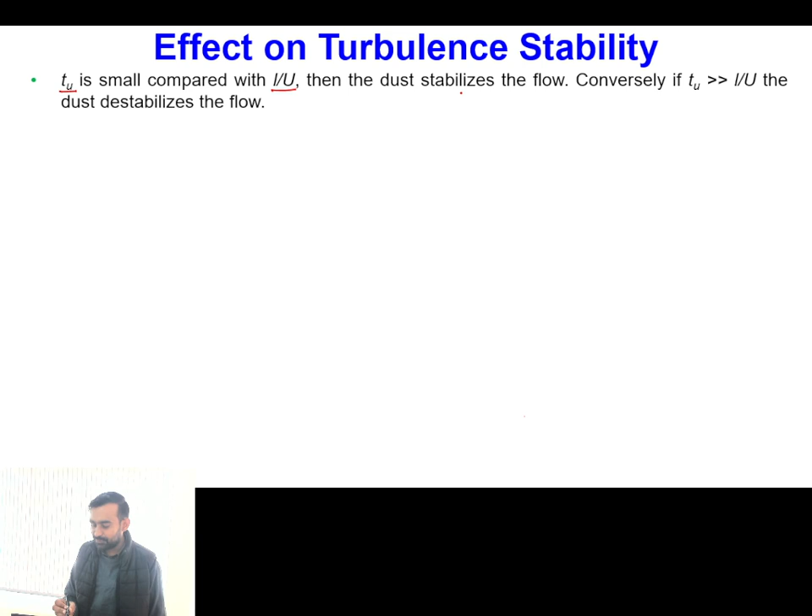So if you recall, we discussed that tau_u is our momentum relaxation time, and l/U is the time scale of the flow. If tau_u is small compared with the time scale of the flow, then particles will actually stabilize the flow, because particles will try to follow the motion, and while following the motion these will consume the turbulent kinetic energy, ultimately resulting in decrease of the turbulent intensity.

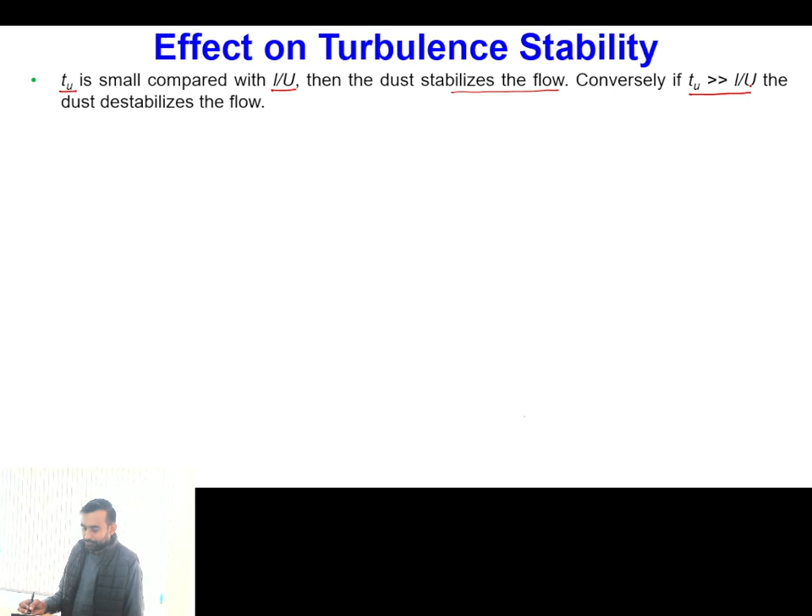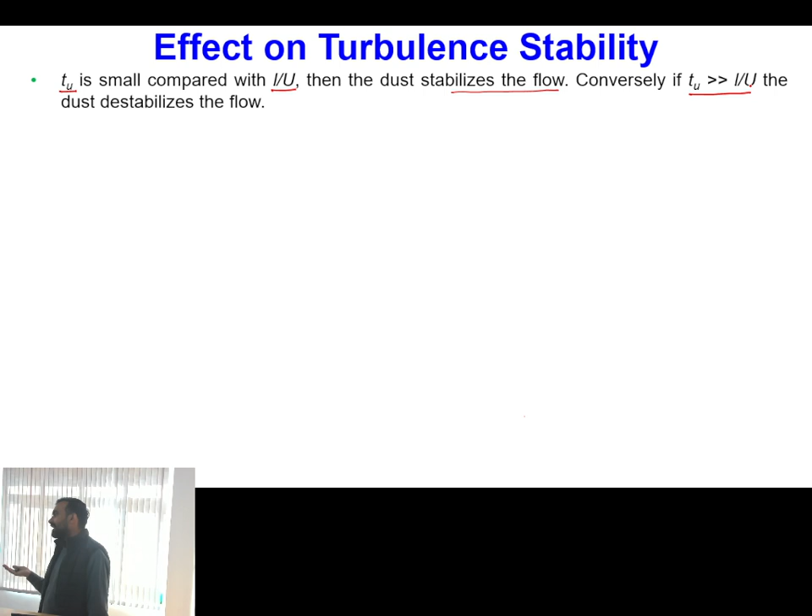On the other hand, if tau_u is large enough in comparison to the flow time scale, the particles will not be able to follow the flow, and particles will respond slower compared to the fluctuations in the flow. In that scenario, what happens? The flow will take place over the particles, and that will lead to generation of more turbulence.

Likewise, in the previous discussion we assumed that all the particles are of solid nature, but when we have multi-phase flow, in place of solid we can have fluid particles as well. So typically, if we have a gaseous bubble present in the liquid, we know that the gaseous phase has compressible nature.

Because of its compressibility effect, if pressure in these directions is increasing, it can deform into this type of shape, and when there is reversal of the pressure, it can occupy this other type of shape. So we see that when gaseous or liquid particles are present within the flow medium, these particles can have oscillations in their shape, changing from this shape to this and then again to this.

So if we estimate the oscillation frequency of the shape change of these fluid particles, and compare it with the natural frequency of the fluid particle, if this ratio of omega_m divided by omega_n is very small compared to 1, then the primary effect of the bubble is to increase the effective compressibility. On the other hand, if the reverse situation is there, the frequency of shape oscillation of the bubble is either comparable to natural frequency or more than the natural frequency.

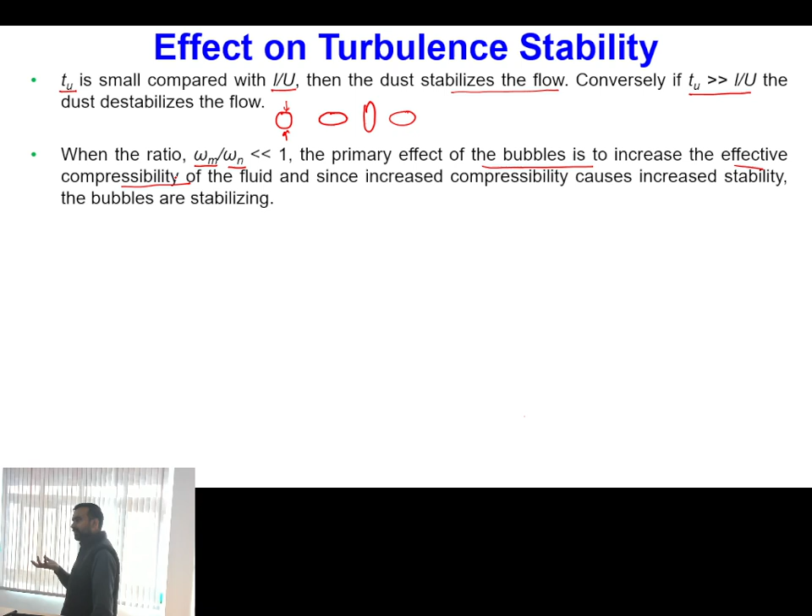In that case, what happens? The bubble oscillations will take place at a faster pace compared to its natural tendency, and it will try to destabilize the flow. Is this point clear?

Now, so that is what I have already told you. We can have some bands of frequency in which flow is less stable, and bubbles are therefore destabilizing.

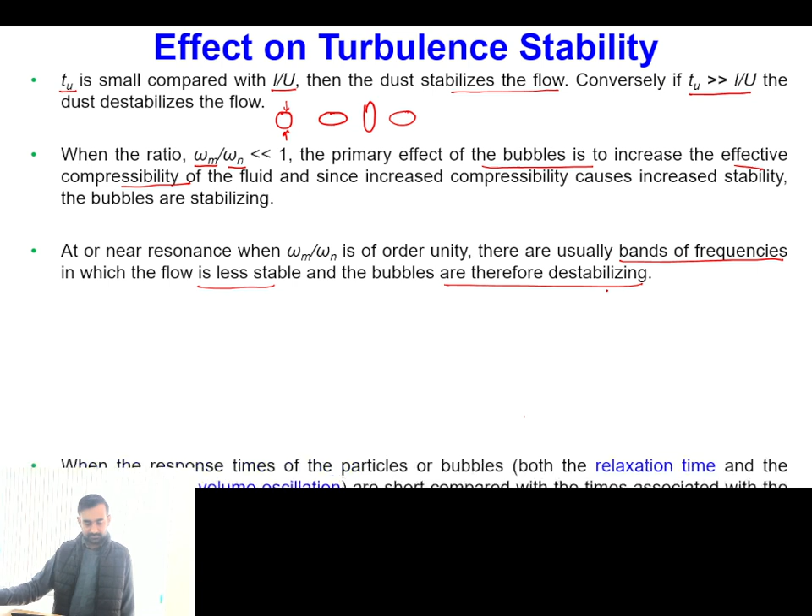In general, we've seen that it's not only the particle relaxation time. In case of fluid particles, along with particle relaxation time, there will be oscillations in the shape of the particles also. So in general, we can say that when the response time of particles or bubbles, both relaxation time and natural period of volume oscillations, are short compared with the times associated with the fluid motion, then the particles will be quickly responding to the flow.

And what can be done? We can say that particles, or the complete flow, can be characterized with effective properties such as effective density, viscosity, and compressibility, etc. Instead of using the characteristics of one particular fluid, we can define the mixture density, mixture viscosity, etc. to characterize the flow. Is this one clear?

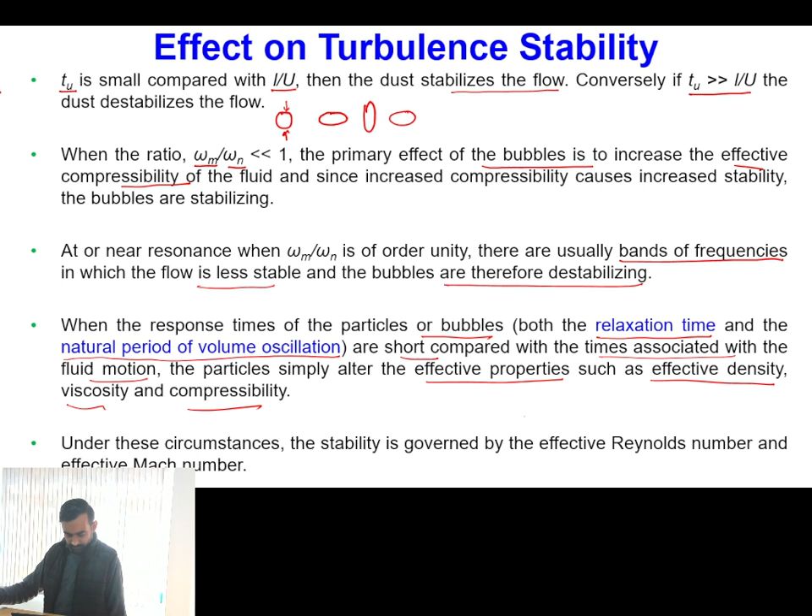So let's see, for example, if I assume I have solid particles present in the fluid, with volume fraction alpha, then the effective density of the mixture of these solid particles and gas becomes equal to 1 plus alpha times rho_s by rho_g. This is the effective increase in density, a multiplying factor with rho_g for effective density. Is this one clear?

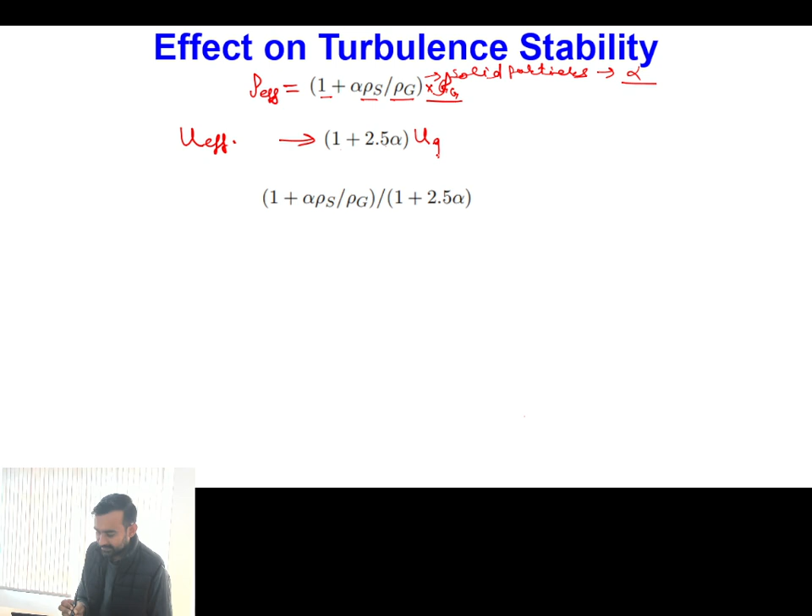Likewise, in terms of viscosity, the effective viscosity becomes 1 plus 2.5 times alpha, times viscosity of the gas. So this factor 1 plus 2.5 alpha is the enhancement factor for viscosity. Is this point clear? It depends upon the volume fraction of solid particles present.

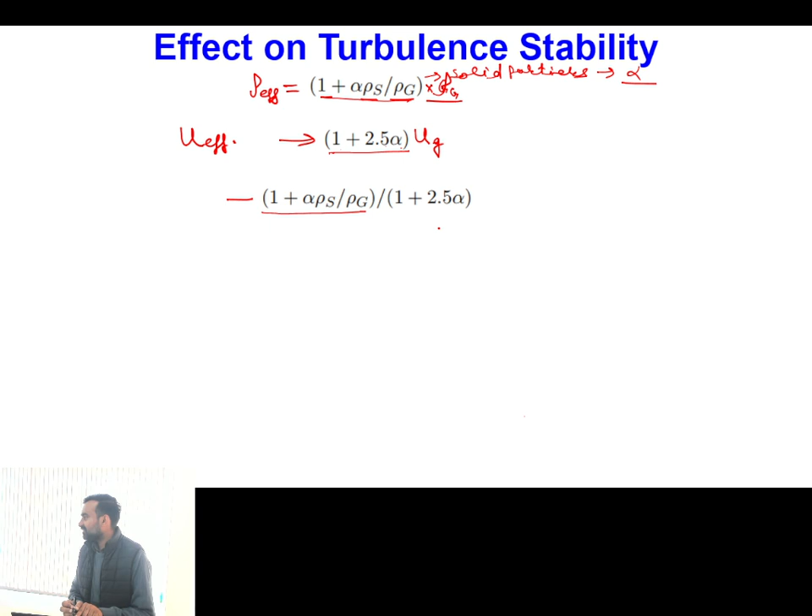Now, if density is increasing by this factor and viscosity is increasing by this factor, we know that Reynolds number will be affected, because in the Reynolds number definition, density comes in the numerator and viscosity comes in the denominator. So this particular factor characterizes the effective Reynolds number, equal to, say this factor is my k, times Reynolds number for the gas. Is this one clear? Now whatever flow parameters I need to specify, I can define based on this effective Reynolds number.

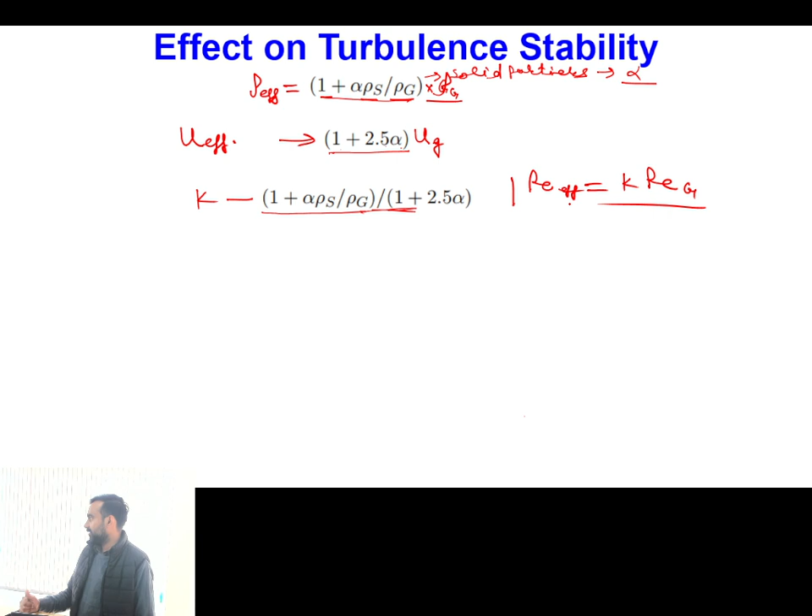If the response times are comparable or greater than the typical times associated with fluid motion, then particles will not follow the motion of the continuous phase. So if the particle is not following the motion of the continuous phase, there will be relative motion between the dispersed phase and the continuous phase.

Once there is relative motion, we cannot make the assumption of effective properties. We can take effective properties, but at least the flow parameters cannot be effective.

Like in the previous case, while defining the Reynolds number, I simply used the multiplication factor for mixture properties, and velocity in both the Reynolds numbers I considered the same, because the particle size was so small that whatever is the velocity of the continuous phase, the same will be the velocity of the dispersed phase.

But in scenarios where the relaxation times are comparable or greater, there particles will not be able to immediately acquire the velocity of the continuous phase. So it will not be able to sense the fluctuation in continuous flow parameters. So we will always find some relative velocity between the particle and the continuous phase.

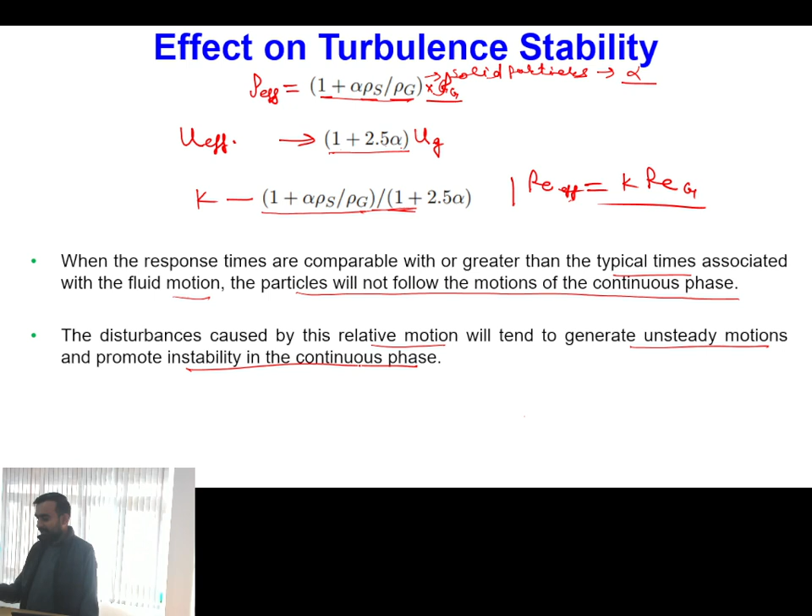Now this is something about averaging. I will not go into mathematical detail, but let me quickly explain to you about the averaging process. If you recall, while we were discussing the control volume for defining multiphase flows, we used one parameter epsilon, which represented the volume of the control volume, selected so that a finite number of particles of the dispersed phase can be accommodated inside a single control volume.

And there we made one statement, which at that time I skipped: that the derivative of the average properties is not equal to the average of the derivatives of the properties. So that is what is given over here.

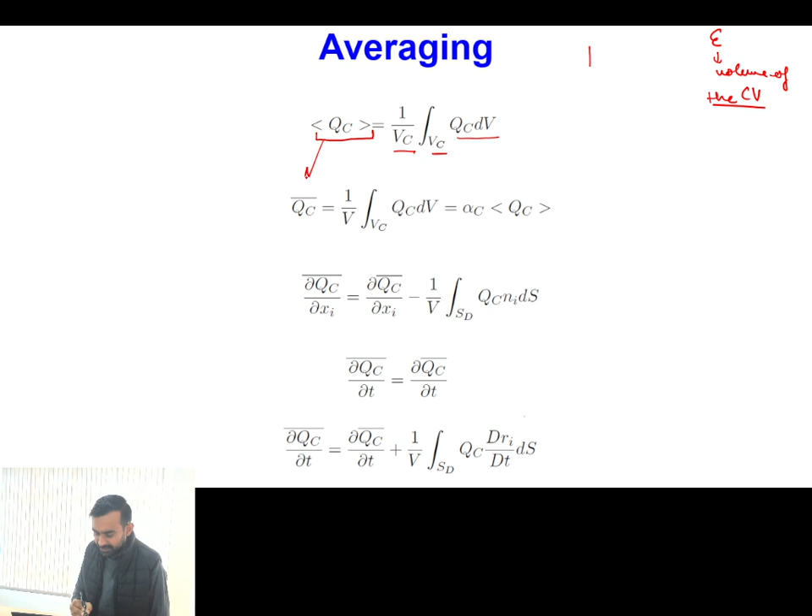So one way of defining some volumetric average of a property of the continuous phase: QC for the continuous phase is defined as 1 by the volume of the continuous phase, integrated over the volume of the continuous phase, of QC. If I have to define the average of the same property, but not with reference to the volume of the continuous phase, but with reference to the total volume of the control volume, then instead we use 1 by V and integral of QC, because the variation I am only accounting for is the continuous phase property. So integration should only be over the VC part.

Is this clear? Now, if I multiply by VC and divide by VC, then VC by V becomes alpha C, and 1 by VC comes in the denominator, which makes this average equal to that. So it means that if you take the average only over the continuous phase volume, and take the same property for the continuous phase but with reference to the total control volume, then the average with reference to the total control volume will be equal to the volume fraction of that phase times the average of the property using the volume of that particular phase.

Is this point clear? Now, up to this point it is simple, but after this you can see one important term: del QC by del Xi. QC is any property of the continuous phase. If I write del QC by del Xi, what does it mean? It means the gradient of QC with reference to position vectors, so it is the gradient of the QC property.

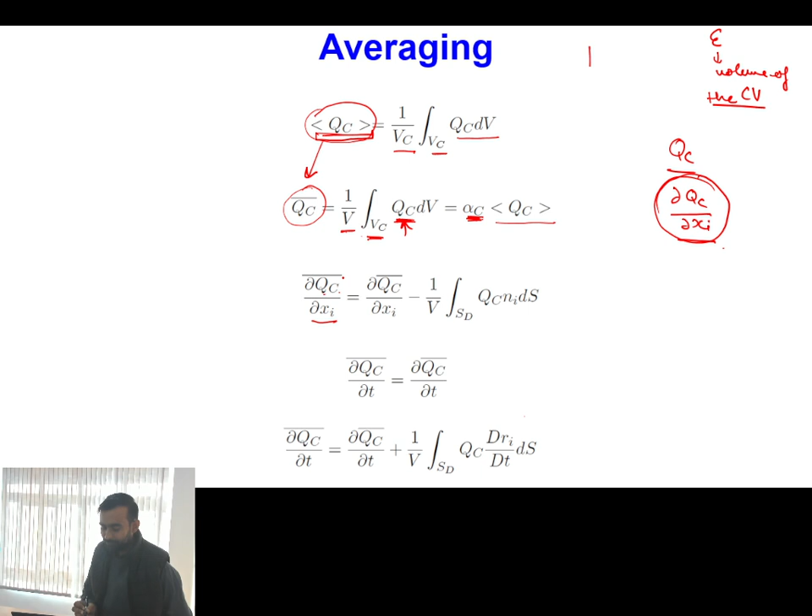If I define the gradient of QC and take the average of this gradient, that can be written in terms of the gradient of the average of that particular property minus 1 by V into the integral over SD, where SD is the surface area of the dispersed phase, of QC Ni ds.

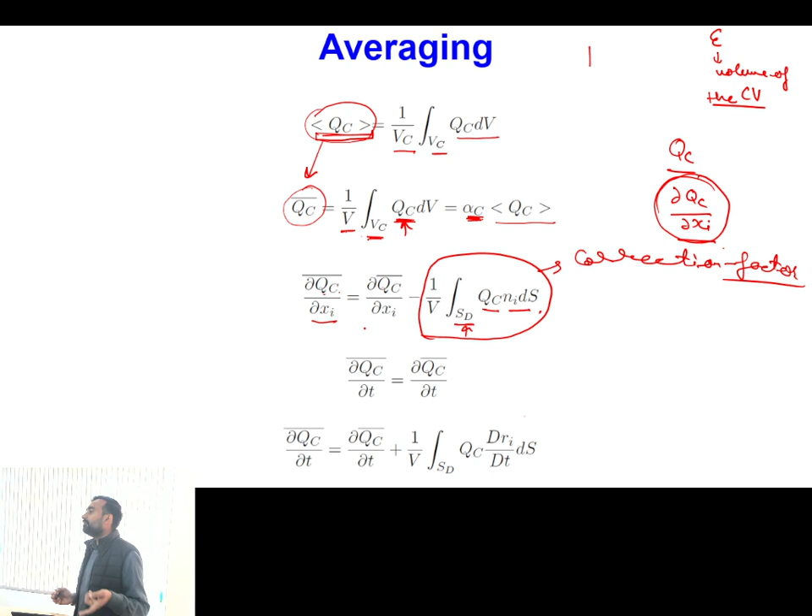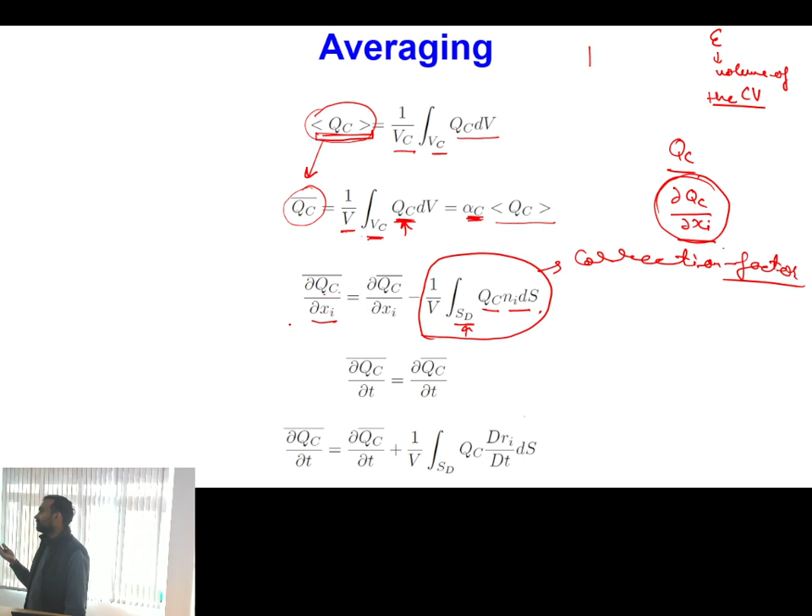So this is coming over here as a correction factor. How this correction factor arises, I am not going into the mathematical definition, but one important point to see is what we have in the left hand side versus the right hand side. In left hand side we have gradient of the property and its average, and in right hand side, first term we have average of the property and gradient of the averaged property. Mathematically, how this additional term comes, I am not going to define, but what we can see is that for a multi-phase flow situation, when we calculate the gradients, the average of gradient of the property is not equal to the gradient of the average property. This additional correction term is coming in.

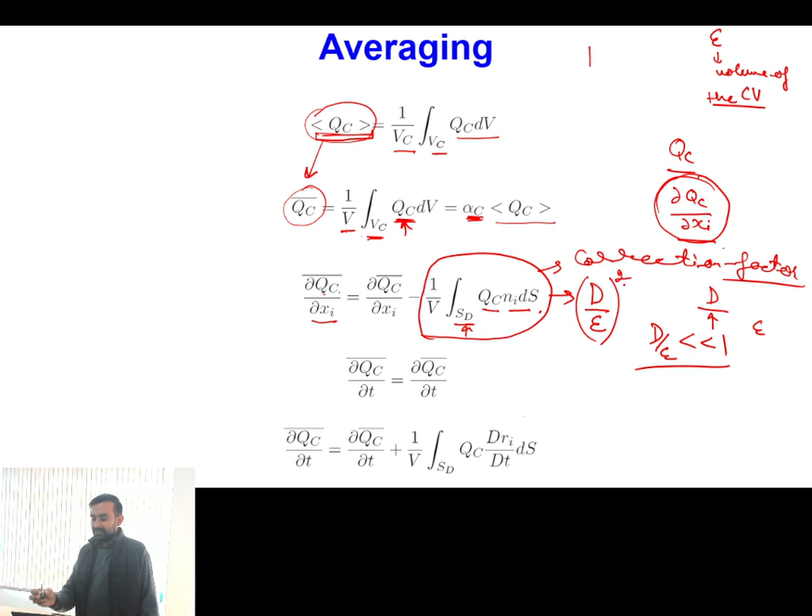The order of this additional correction term comes out to be d by epsilon square, where d is the size of the dispersed phase particle and epsilon is the volume of the control volume. If the ratio of d by epsilon is very small, the control volume will contain a finite number of dispersed phase particles within it, and the magnitude of d by epsilon square will be small. So if your control volume is sufficiently large to accommodate a finite number of dispersed phase particles, the magnitude of this additional term will be very small, and the gradient of property, its average, can be made equal to the gradient of the average property. However, if d by epsilon ratio is large, these two will not be the same.

Likewise, if the condition is satisfied that d by epsilon is much smaller than 1, then the time derivative of these properties will also become the same. If this condition is not satisfied, like d by epsilon is either nearly equal to 1 or greater than 1, then this additional correction term has to be taken into account. So let us discuss only this much for now.

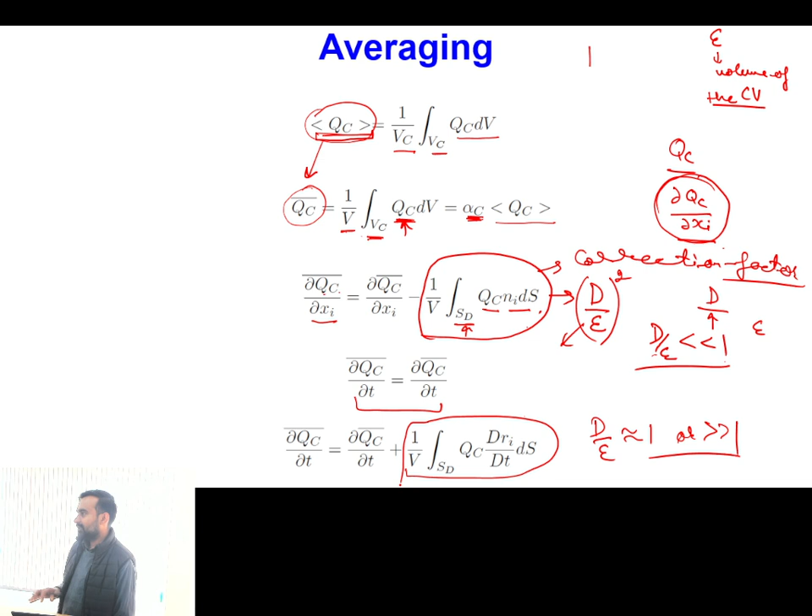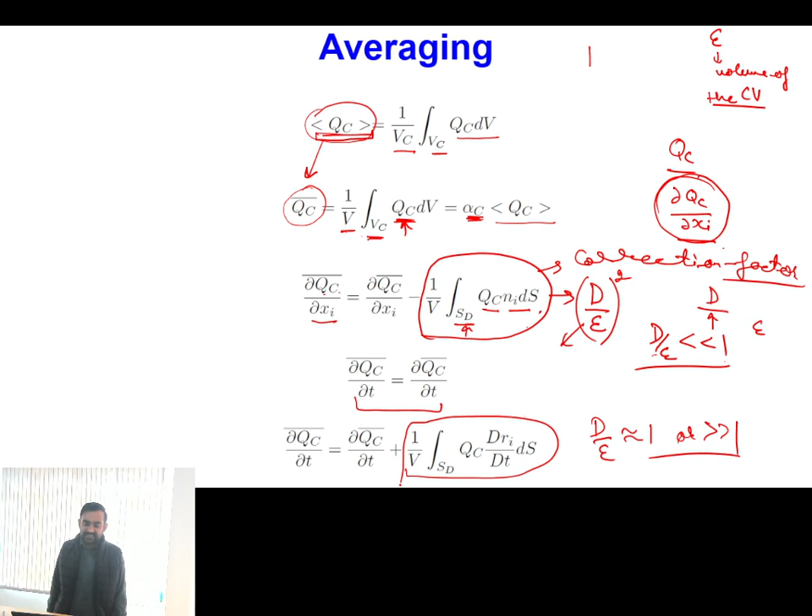Averaging can be defined in different ways. Either I first define the average of the property for the control volume, and then estimate the gradient of that average property, or the time derivative for that average property; or the other way is that I first calculate the gradient or time derivative of the property, and once I have defined that, then I take its average. These are two different processes, and in these two processes, if d by epsilon is small, both will give the same outcome. If d by epsilon is large, these two terms will give different outcomes.

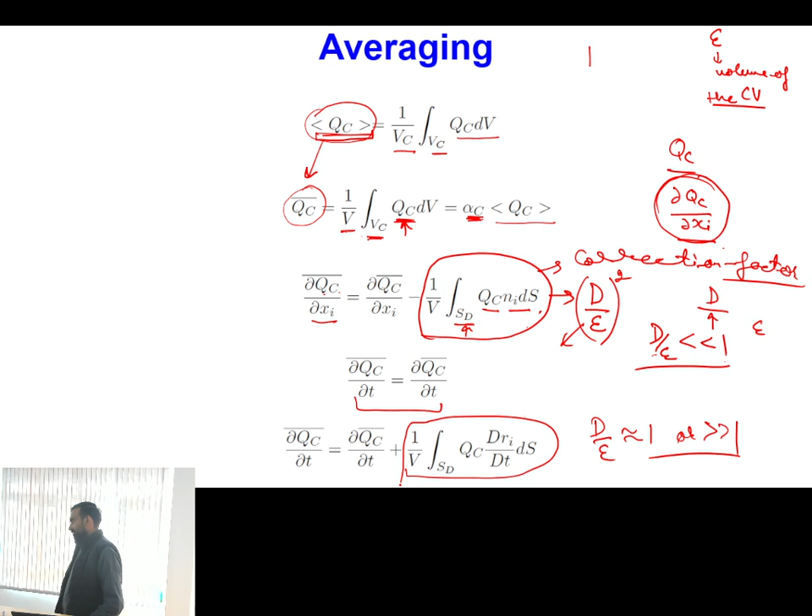Now let us discuss more about flow regime maps. Till this point we have got the idea about the governing equations applicable for multi-phase flow, and we have seen that these governing equations have different forms. Now depending upon the physical nature of the flow, we have to decide which type of governing equation to choose. Before choosing the governing equation, we should also know how my phases are distributed within the system. Unless the distribution of the phases is clear, we cannot select the appropriate governing equations for analyzing our flow situation.

For example, if I say that my particles are of very fine size and these are dispersed within the continuous phase, then I can simply make the assumption of homogeneous flow. I can assume that the velocity between the dispersed phase and continuous phase is the same, there is no relative velocity, and by just measuring the effective properties, I can simply use the mixture continuity, mixture momentum and mixture energy equations. On the contrary, if it is clear that particles are of larger size and there is significant drift between the two phases, then we have to account for individual phase equations, and in the individual phase equations we have to define the interaction terms across the phases.

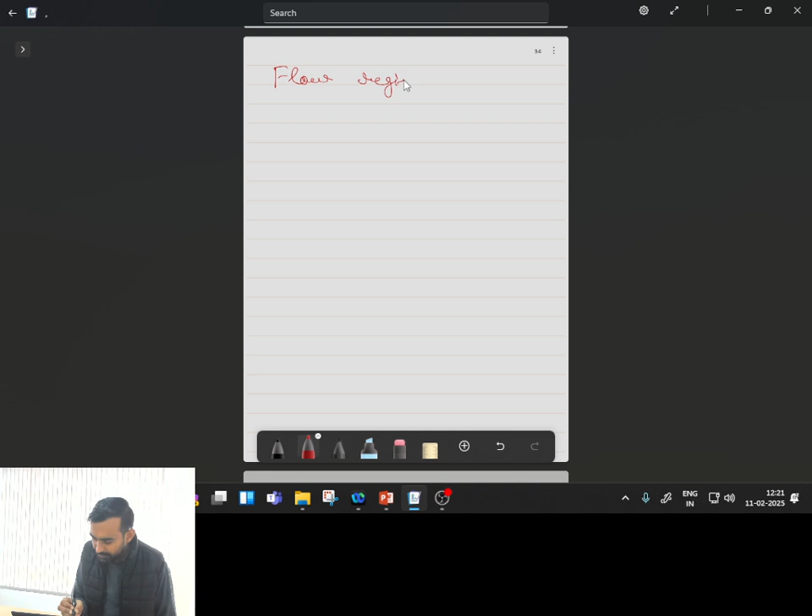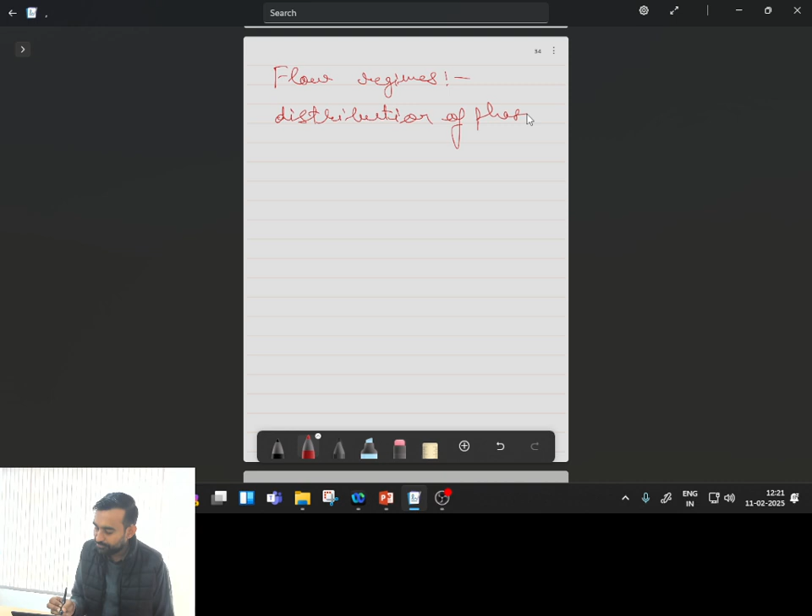Now, distribution of phases is actually very complex. Flow regime gives the idea about the spatial distribution of phases present in the system. Now can you tell me on what parameters this spatial distribution can depend?

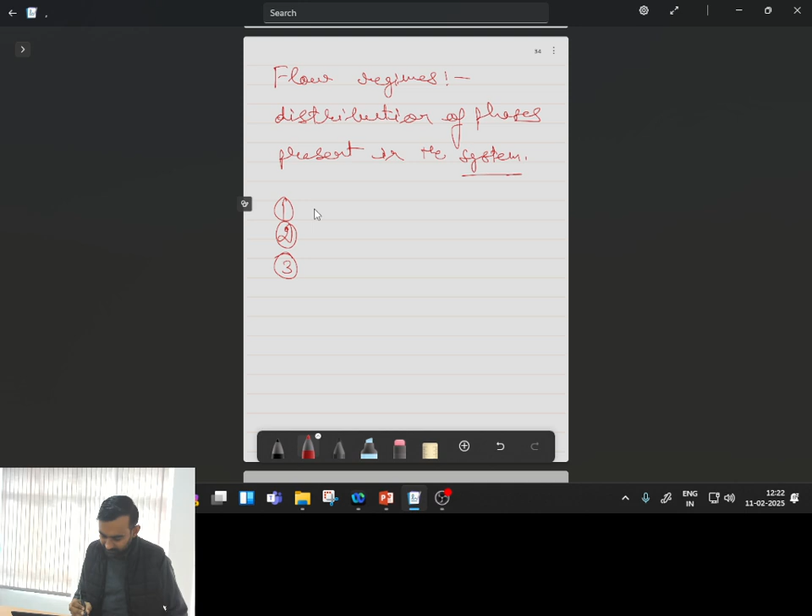If you have a circular pipe, there can be different arrangements of the flow. If you have a rectangular pipe, there can be different distribution because corner effects come into picture. If you have some pipe bend, something else will happen. If you have horizontal pipe, vertical pipe, inclined pipe, it means channel size, cross section, and channel orientation are some parameters which will be affected.

So these are some parameters which will be affected. Then what else? It will also depend upon the requirements whether my flow is adiabatic or it's a phase change process.

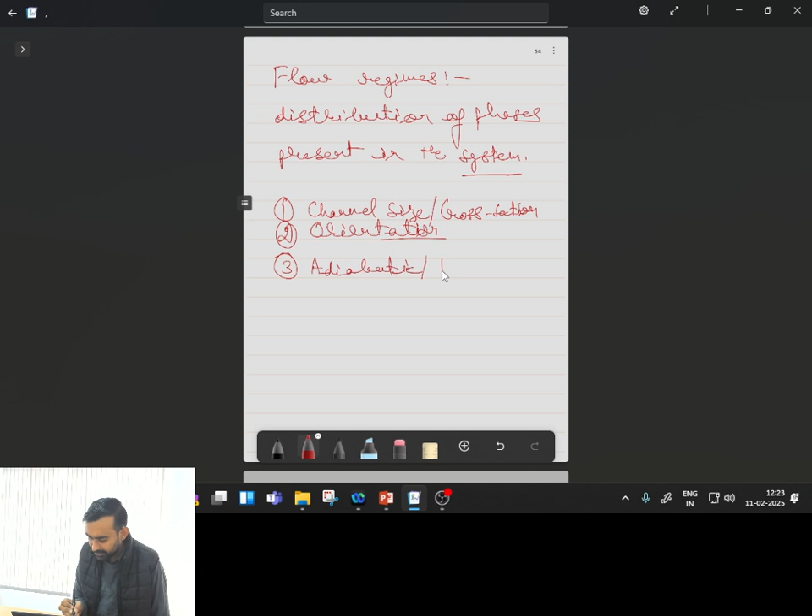Because if I am having an adiabatic situation, then depending upon the rate at which we are supplying flow from the inlet, mostly it should have almost the same amount of volume fraction present at different portions of the pipe. But if I am having a phase change process involved, for example in case of flow boiling, then near the inlet of the pipe I will be having less vapor fraction, but as I move away from the leading edge and come closer to the end of the pipe, more vapor volume will be generated. So vapor fraction will be increasing and liquid fraction will be changing along the length of the pipe. So it means whether my flow is adiabatic or diabatic, whether heat transfer is involved or not, depending upon that the distribution can change.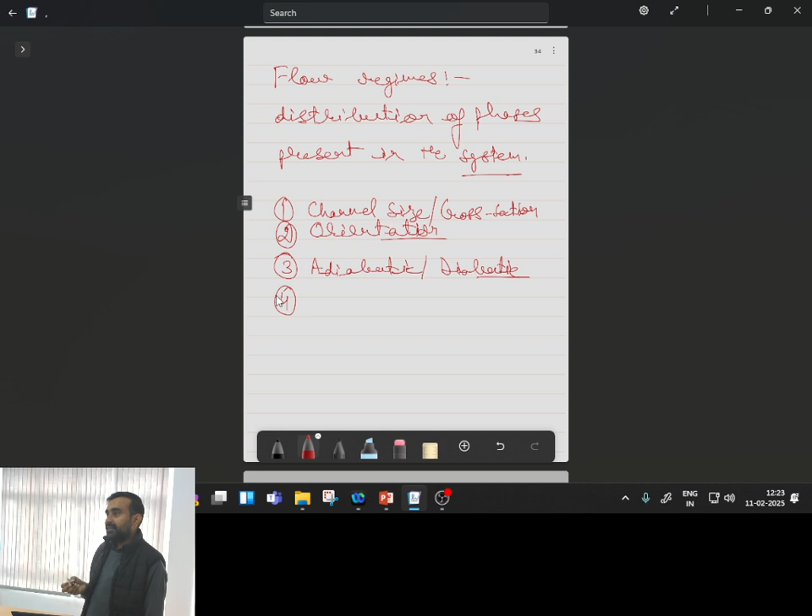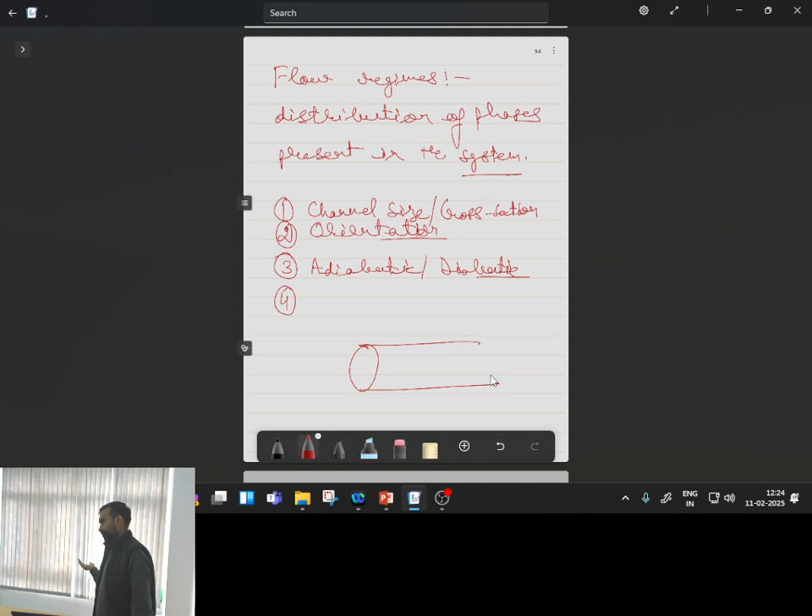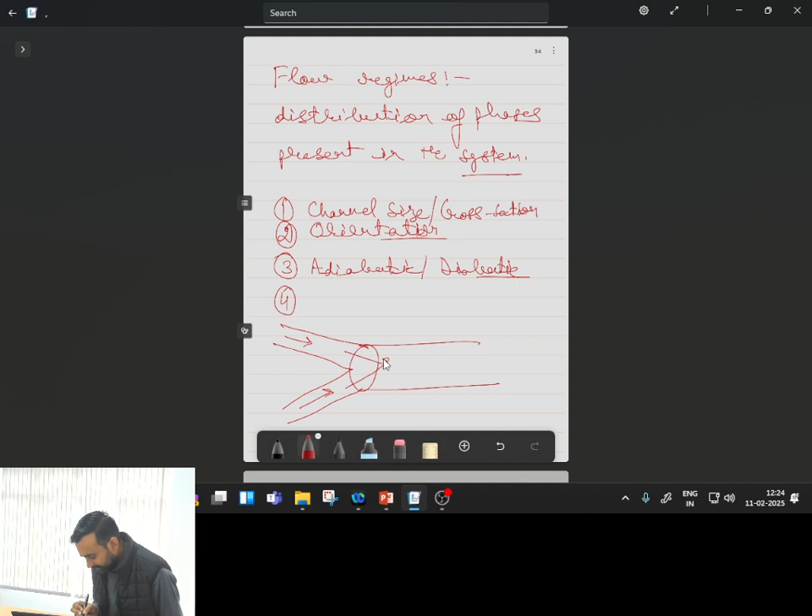Next important point is, typically if you have a pipe in which two phases have to flow, I can define the inlet of the phases in different ways. For example, in one case I may have some Y-section type inlet where fluid 1 is entering from here and fluid 2 is entering from here. At this junction I can have crossing velocities, and this can create some mixing effect at the junction point.

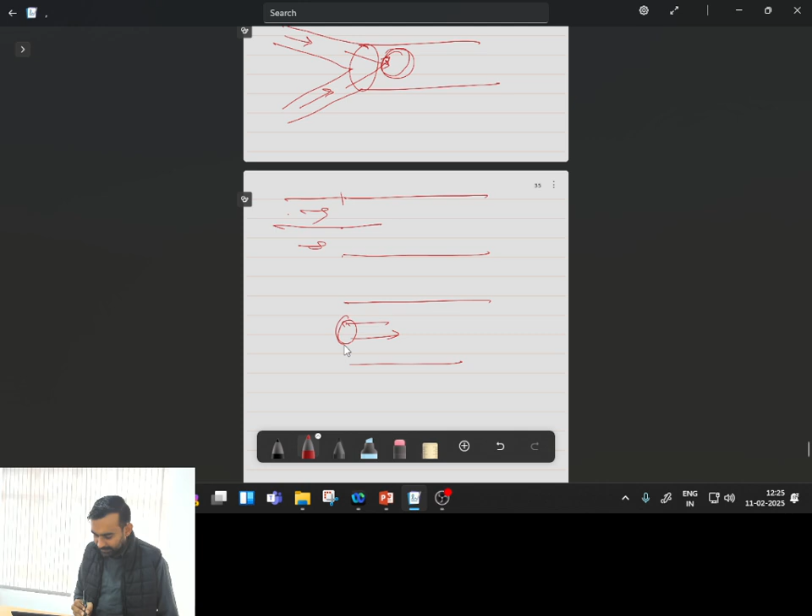Instead of this, I can also have an arrangement where, in this pipe, I have some separation plate. Above this separation plate one fluid is coming and below it the second fluid is coming, so in this case both phases are actually coming with smooth entry. There can be some scenario where through the center portion one fluid is entering and through the annular portion some other fluid is entering. So I can have different designs of inlets available for the flow.

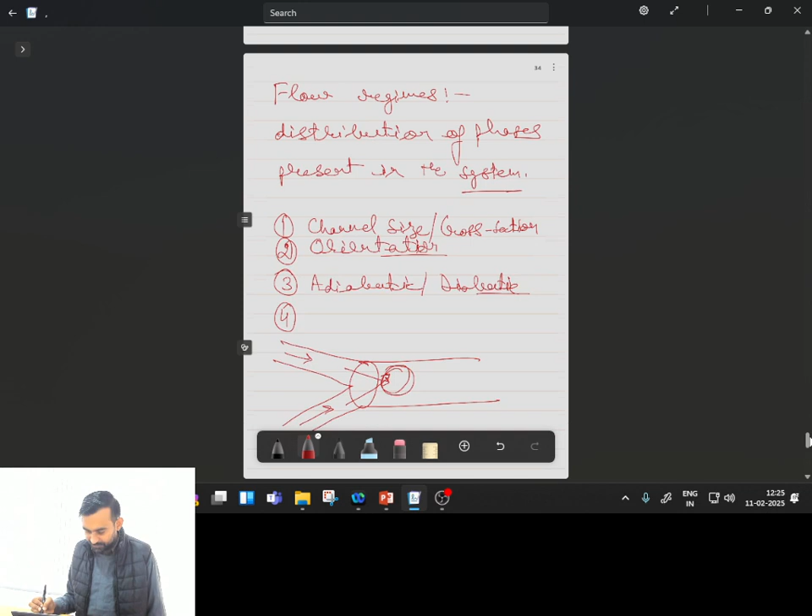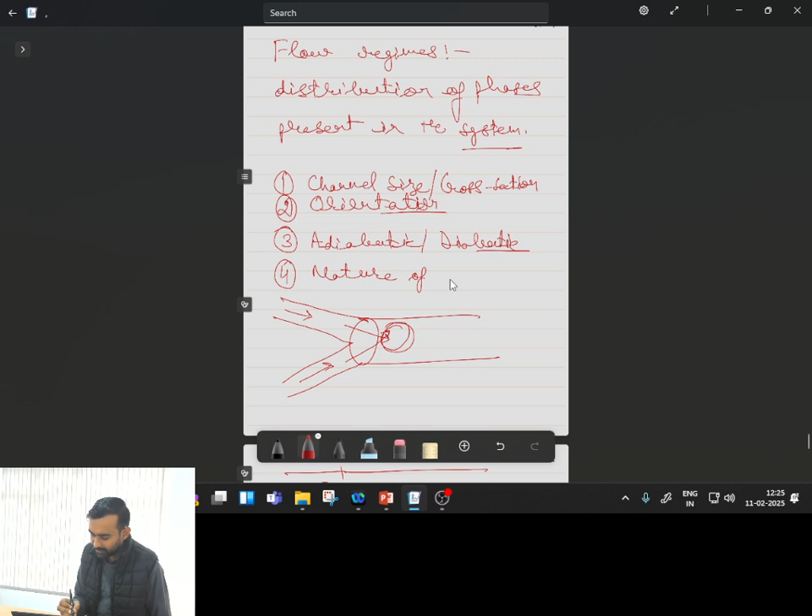So it means that initially, typically in the initial portion, as in case of single phase flow, we have an entrance effect, and once we have sufficiently moved away from the inlet portion of the pipe, the entrance effect becomes negligible and flow is almost fully developed, giving similar characteristics irrespective of the design of the intake. So, nature of entrance will influence the distribution of phases typically near the entry portion, but if we move sufficiently away from the entry portion, its effect can be less.

Is this one clear? It will also depend upon the fluid properties and flow parameters.

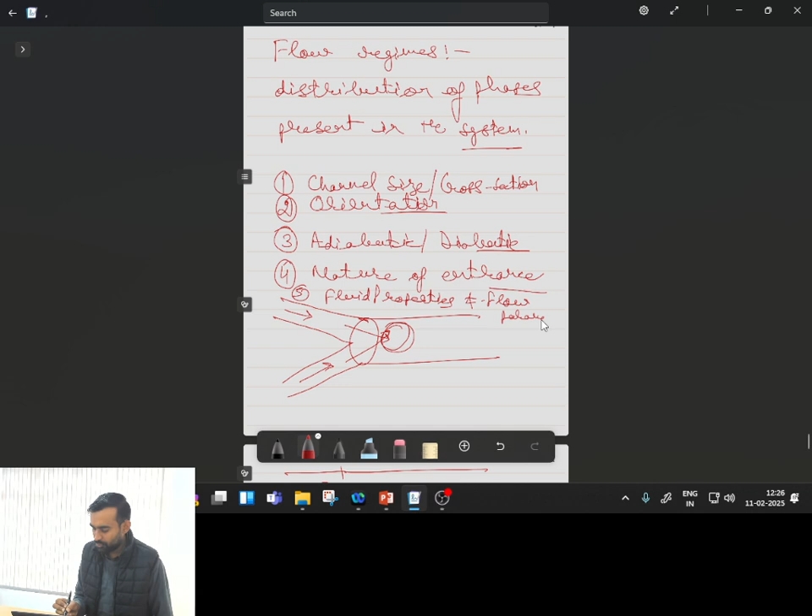For example, if you have one gaseous fluid and one liquid fluid flowing together, their density and viscosity ratios will be very, very large. On the contrary, if you have two liquids jointly flowing inside a single pipe, the ratios of their density and viscosity will be less. So accordingly, the corresponding magnitude of corresponding forces will be changing significantly. At the same time, flow parameters like velocity etc. will also be controlling the flow.

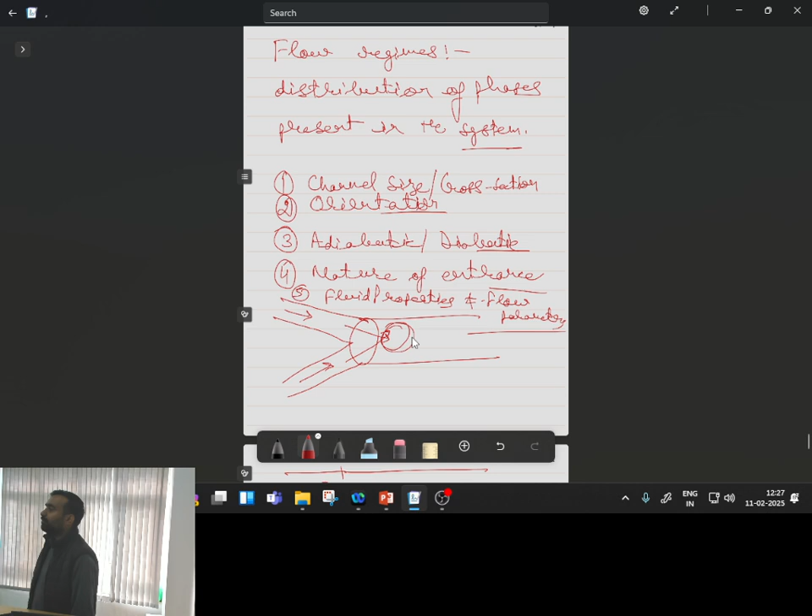Now, whenever we talk about single phase flow, depending upon fluid properties and flow parameters, we have majorly two different types of flows: laminar flow and turbulent flow. But in case of multi-phase flow, because multiple fluids are associated, their distribution will be actually different. So depending upon the different distribution and association of the phases, there can be multiple flow regimes present within the system.

So let us try to see what type of flow regimes we typically encounter. Here first we are talking about the flow regime map. A flow regime is a particular condition of distribution of the phases, and a flow regime map combines the multiple combinations of flow parameters which result in a particular regime. It also gives the transition boundary from one type of distribution of the phases to another type of distribution of phases, meaning it defines the transition boundary from one regime to another. So in this flow regime map, first we will be discussing only the horizontal pipe flow.

So orientation, we have fixed that our pipe is horizontal. This particular flow regime map we are showing is for air-water flow, and the size of the pipe is 5.1 centimeter, so diameter of the pipe is 5.1 centimeter.

Flow regime depends upon the distribution of the phases, so whatever analysis we are doing is based on the visualization of the flow. Second important point is, the nature of the entrance influences the flow. The way we allow two fluids to enter will influence the distribution of the phases present in the pipe.

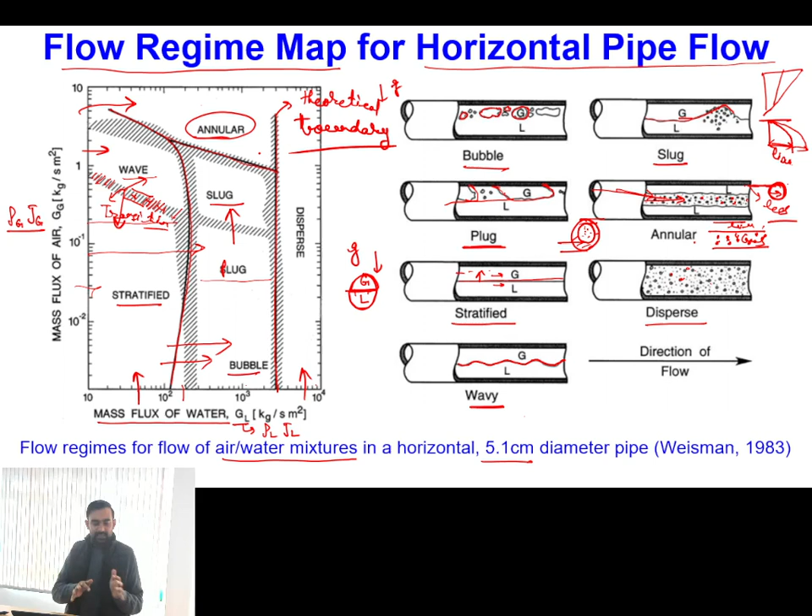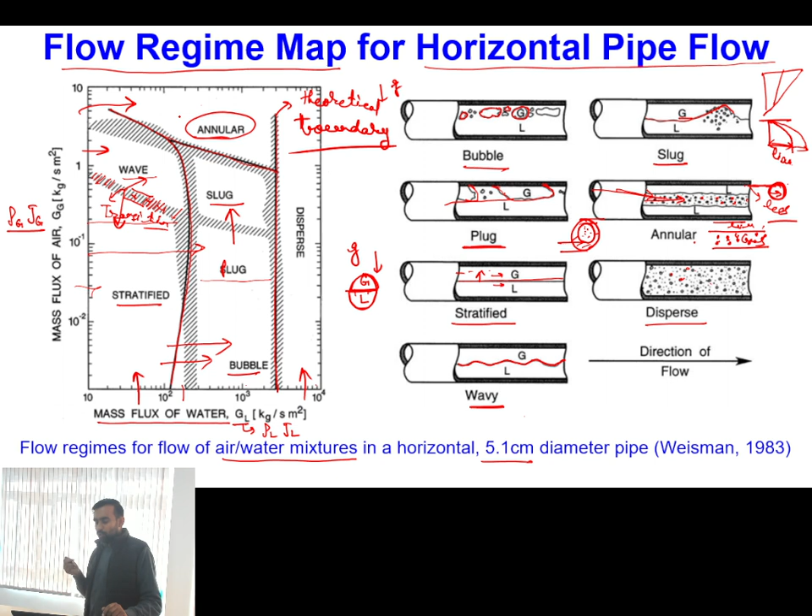Typically, when we study the transition from stratified to wavy or annular regime, we consider that these two fluids are co-flowing together, and at the interface we artificially or mathematically introduce some perturbation. If the conditions cause this perturbation to diminish and not grow with time, the flow stays in the stratified regime. But for velocities and flow parameters where this perturbation grows significantly in amplitude, it means the transition from stratified to wavy or other regimes is happening.

The theoretical analysis which gives the transition from stratified to wavy regime, based on the difference of relative velocities across the interface, is called Kelvin-Helmholtz instability. If you have two different phases with different velocities in the gas and liquid, then depending on the difference of velocity, whatever instability grows at the interface is called Kelvin-Helmholtz instability.

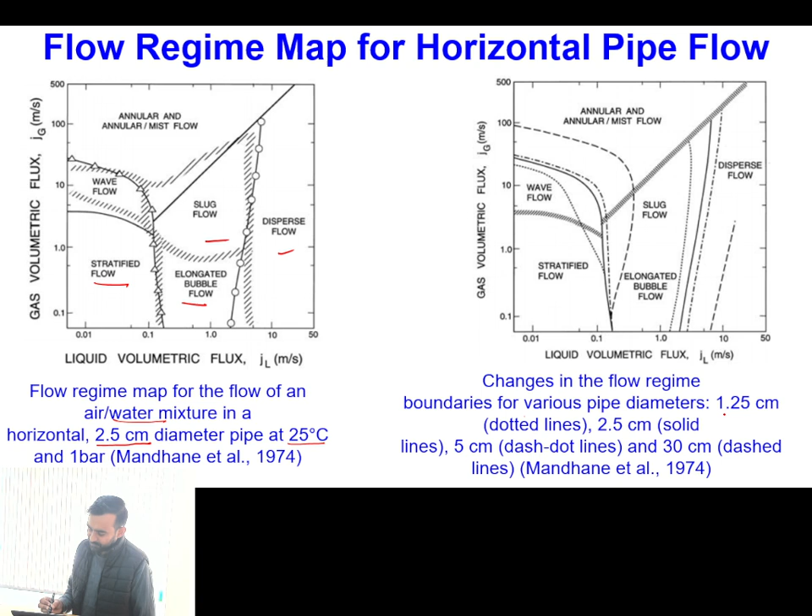Here you can see multiple transition boundaries shown, corresponding to various pipe diameters. For example, the dotted line is for 1.25 centimeters, showing the theoretical limit of transition from stratified to wavy flow for that pipe size. The solid line is for 2.5 centimeter diameter pipe, the dash-dot line is for 5 centimeter, and the dashed line is for 30 centimeter.

So in this graph, how much is plug flow here? Which one, this particular one?

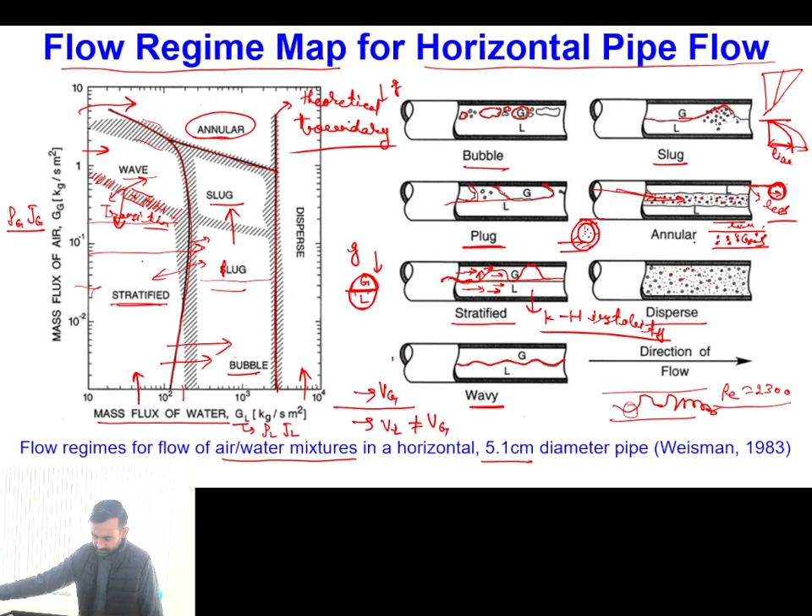In both. Basically all these flow regime maps are given by different researchers. For example, this one is from this work, this is from this work, and this is from some other work. Typically the flow regime maps that came long back are from visualization studies, mostly based on nomenclatures used by different people.

It may happen that someone who saw multiple bubbles merging together and forming a larger sized bubble called it plug flow. But another person, instead of plug, gave it the name elongated bubble flow, meaning bubbles are elongated along the flow. So these names are based on visualization, and different people have used different nomenclature. Our interest should be to specifically see what is the distribution of the phases.

Okay, to determine the conditions corresponding to distribution of phases rather than their name. Name can have some differences because all these observations are based on the nomenclature and the flow visualization observed by different people.

Sir, practically, how can, let's say liquid is flowing through a pipe, then how can we introduce the air in it? How do people introduce air in the pipe?

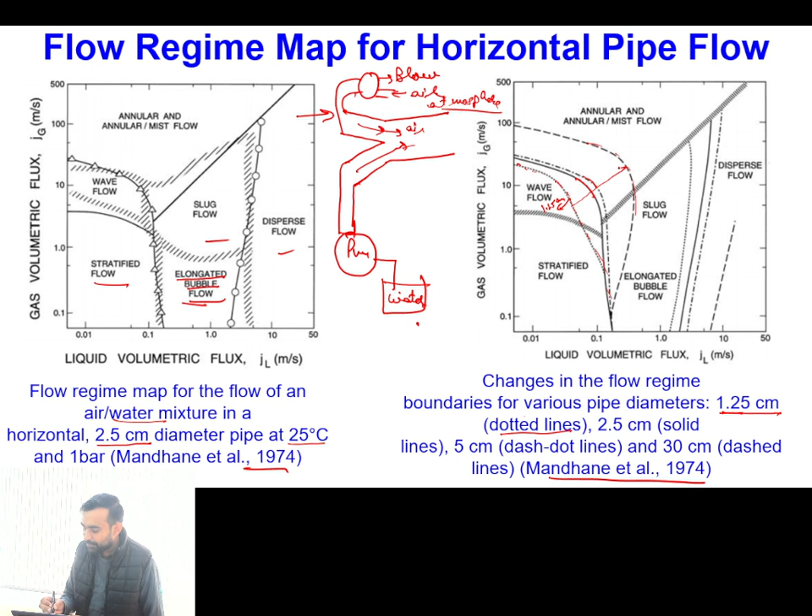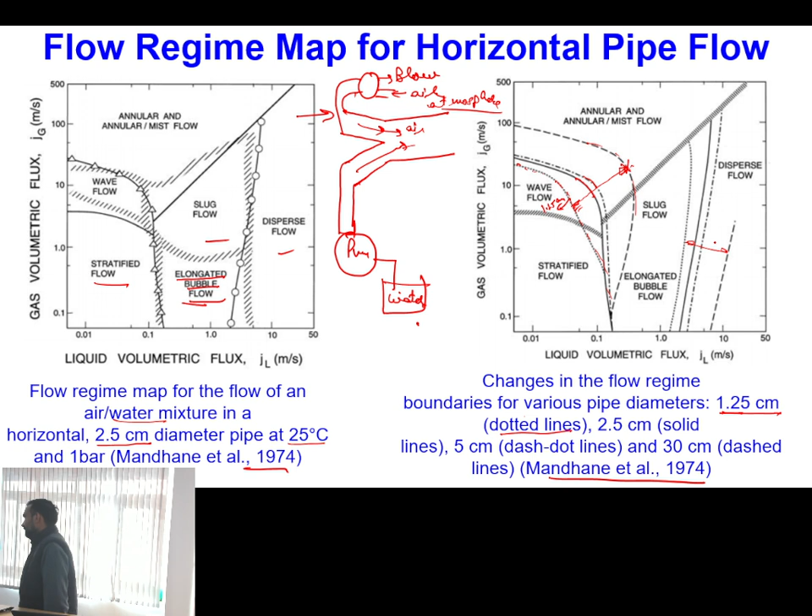Here you can see that whenever you increase the size of the pipe, transitioning from 1.25 centimeter to 30 centimeter diameter, this much difference comes. So defining universal boundaries is actually quite challenging. Situations are very much specific to the physical phenomenon we are actually taking into account. Is this point clear?

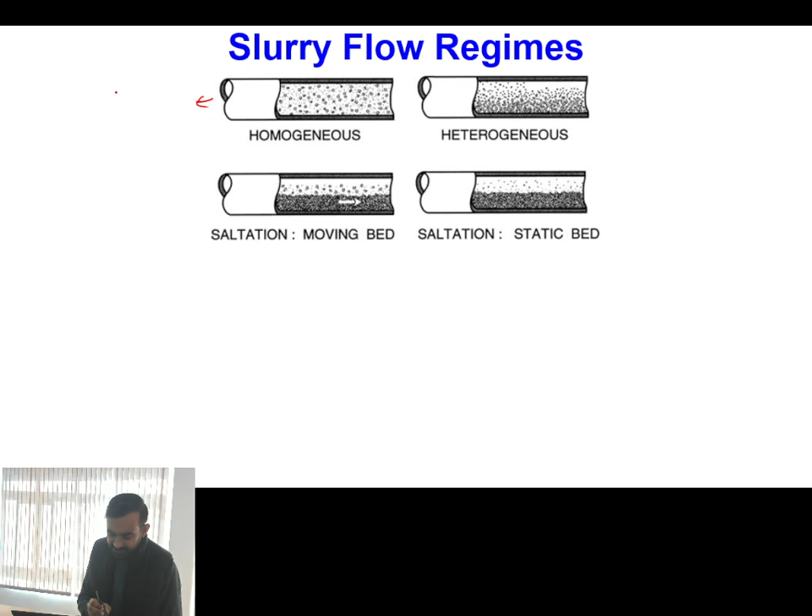Now, these are flow regimes for slurry. We already know that for slurry, whenever particle sizes are small, say somewhere close to 5 to 15 micrometers, and the volume fraction of particles is low and velocities are sufficiently high, there will not be any particle-particle interactions, and particles will be almost suspended in the flow, which is called homogeneous flow.

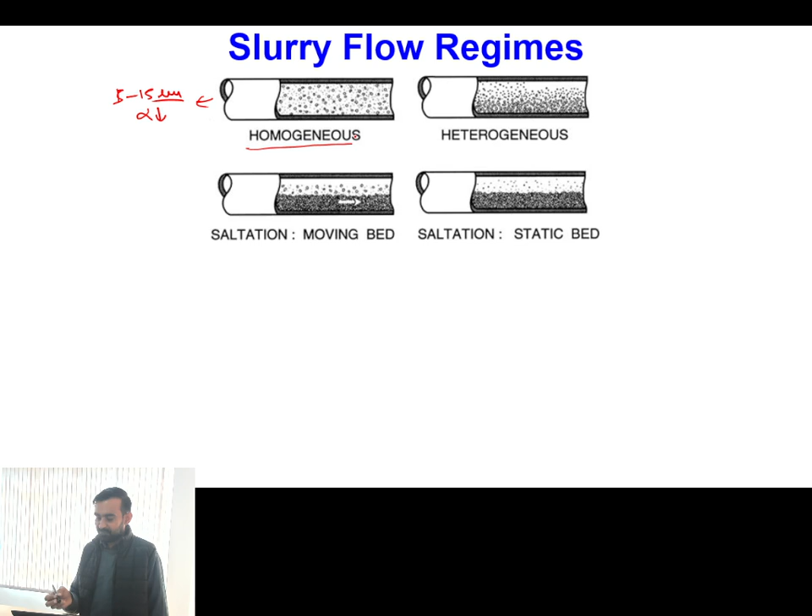And when particle sizes are somewhere close to 30 micrometers and the volume fraction of particles is slightly increased, some particles will start settling at the bottom, having a non-uniform concentration profile, and this type of flow is called heterogeneous flow.

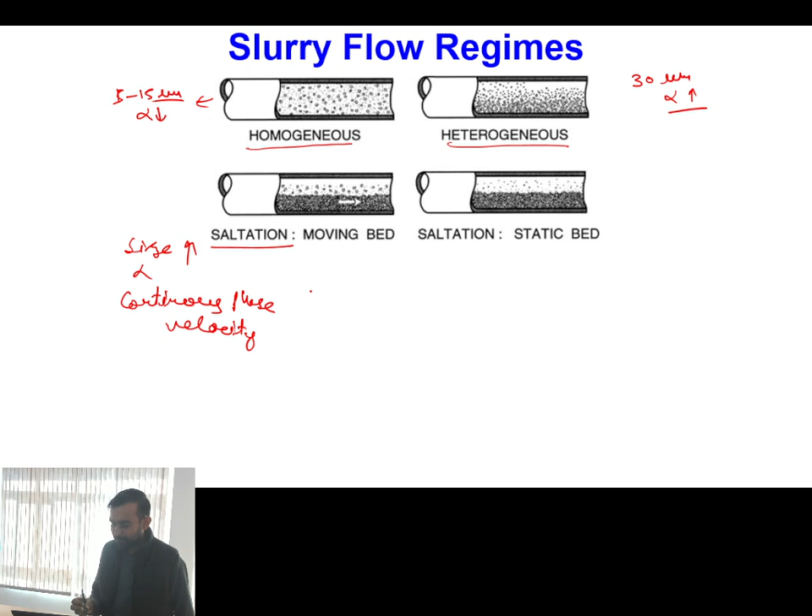If we further increase the particle size and volume fraction, or decrease the continuous phase velocity, the particles will start settling at the bottom, and this bed will also be sliding over the pipe surface. So this is a moving bed scenario.

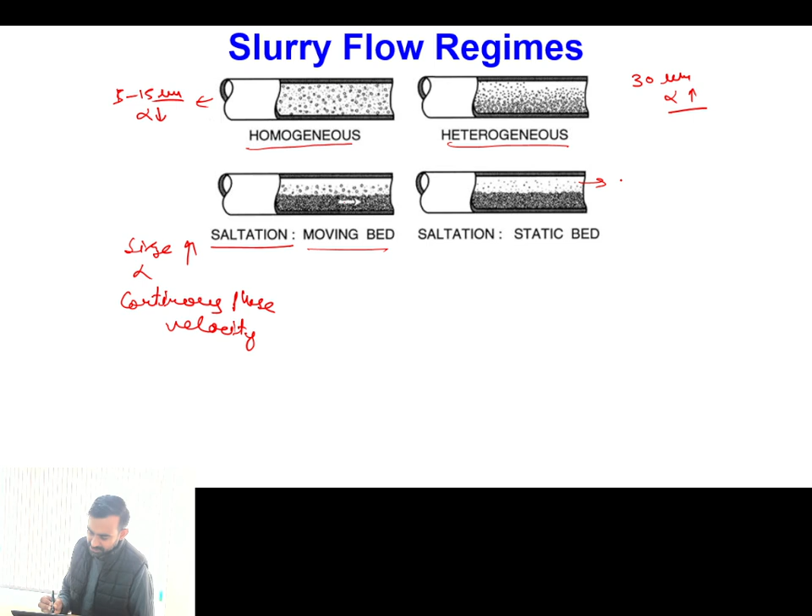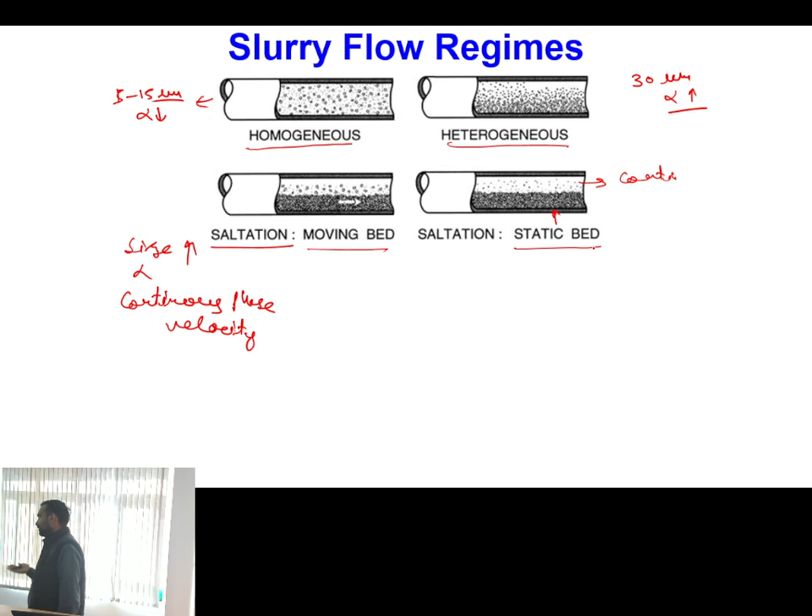And when we are having most of the settling, and at the top mostly fluid with only continuous phase is present, and the bed becomes static, this will be a situation of blockage of the pipe, or slug. Okay, maybe about gas-solid regimes we will discuss in the next class.